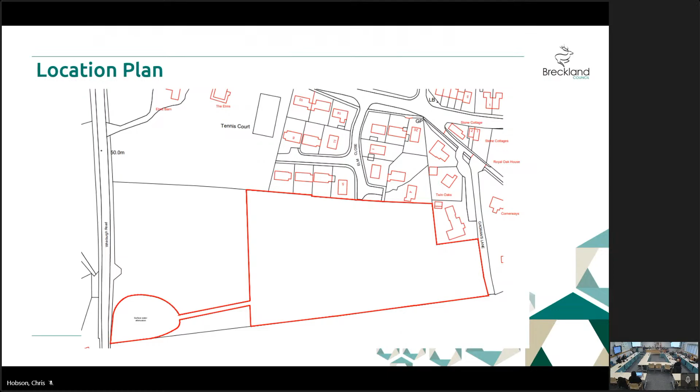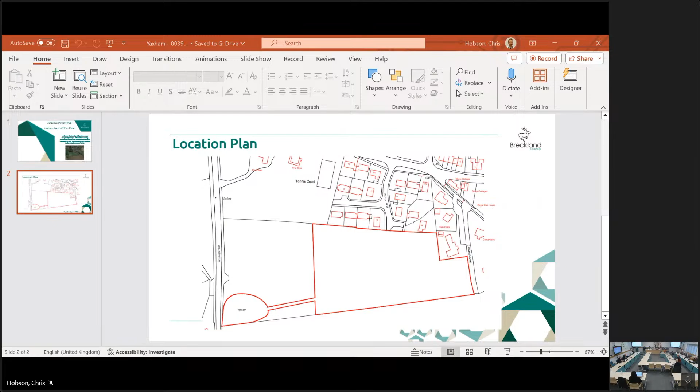Good morning and happy Christmas. My name's Graham Howe. I'm a parish councillor for Yaxham, and in my former life, as I'm now retired, I was managing director of Hill Partnerships and Kier Construction, both fairly sizable construction companies.

We of the parish council are opposed to the reduction of affordable homes by Flagship on this site. I'm not going to rally on for our reasons, but they are recorded and summarised in our response, which was posted on the 2nd of October. The affordable housing allocation to this planning application was the only real benefit that this development will bring to our community. We have read the responses returned by Flagship to this application in detail, and we are somewhat confused by the financial values posted by Flagship via Watson's letter in their response dated the 22nd of November, which is still modelled on the provision of 40% affordable housing, but I guess this is by some way of providing a comparison.

We note Flagship's comments at the Planning Committee meeting of the 31st of October, repeated in their letter dated the 4th of December, which states Flagship Group's purpose is to deliver affordable housing, and Flagship Housing Developments will endeavour, using options available to us, to increase the affordable housing on this scheme back to 40% as the scheme progresses. We would really welcome this, and we seek confirmation from Flagship that the houses in question will retain affordable housing specifications, or are they one and the same as those that are for housing for sale?

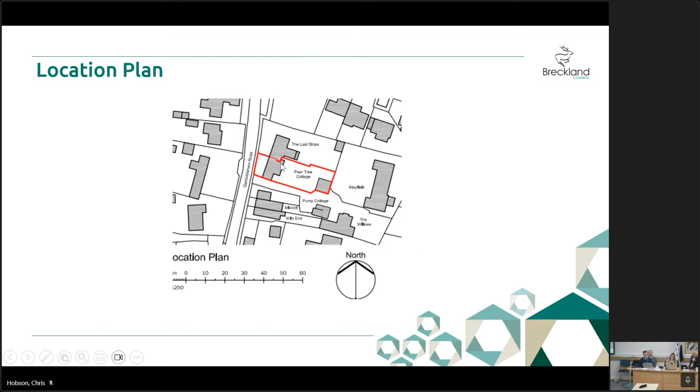Okay, so as you can see, this is the location plan. So you've got the site here in red. So this is Pear Tree Cottage, the existing dwelling, and then this is a detached garage at the rear, and it's semi-detached with the neighbouring property, the Last Straw. And then, as you can see, it's also situated in an area of residential dwellings. And then this just gives you further site and wider context. Just to note that this is the centre of East Harling here, so it shows the proximity to the main centre.

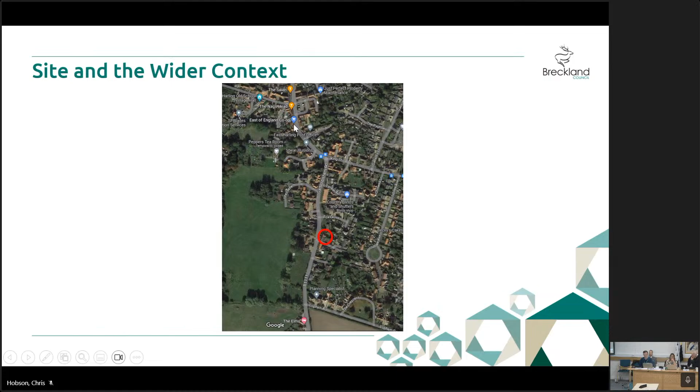Okay, so this is the proposed site plan.

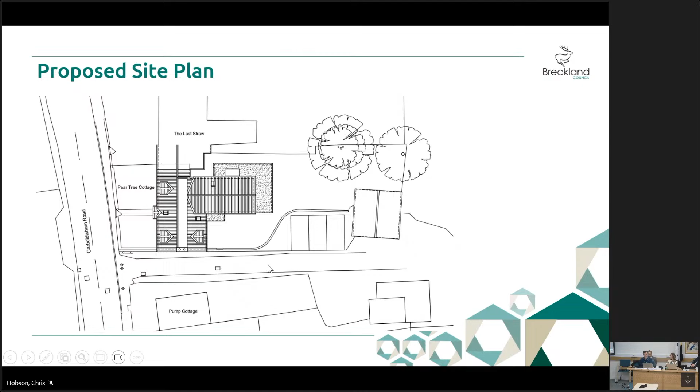As you can see, this is just to show the existing dwelling, which is situated here, and then this is the rear. The parking is going to be situated here, and the existing garage is going to be retained as part of the development, and the main access for the dwelling comes off Garboldisham Road here, which is shared with other properties within the vicinity.

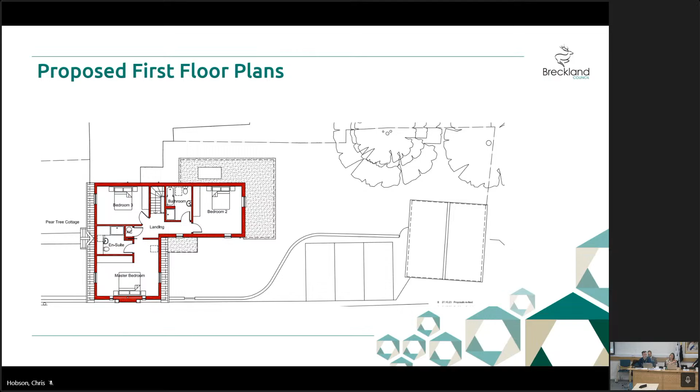And then, as you can see, this is the first floor. So you've got 3 bedrooms that are proposed. And then these are just the proposed section plans.

So it's not formally designated within any heritage, it doesn't have any heritage protection as such. However, as you can see from the property's aesthetic, it's got a thatched roof, and it also has many traditional features. So given the aesthetic of the property, the Historic Buildings Officer for Breckland Council was consulted.

They did confirm that they held concern regarding the loss of the building. So for them, they considered that the building had heritage value, and so after an assessment against Historic England's local listing criteria, as officers, we did consider that the property was worthy to be considered a non-designated heritage asset.

So non-designated heritage assets are where they have protection under the National Planning Policy Framework, and it's where local authorities can govern a local list to protect these properties or buildings where they consider there to be heritage value.

So your local plan policy, ENV 08, restricts the demolition of non-designated heritage assets, subject to demonstrating that it's no longer either viable or structurally sound to retain the building.

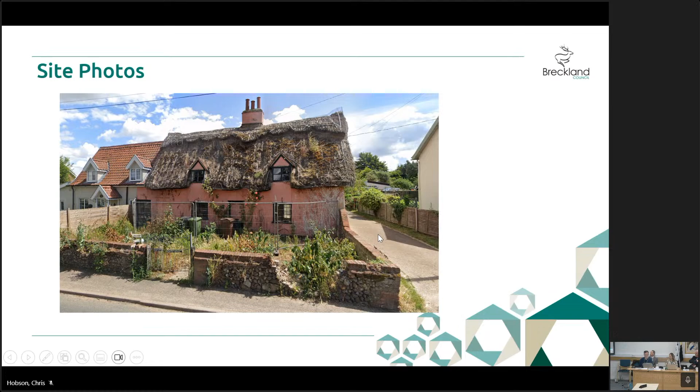So as you can see, this is the current property looking at it from Garboldisham Road, and this is the access. This is it looking at it towards the rear, and as you can see, this is the neighbouring dwelling there.

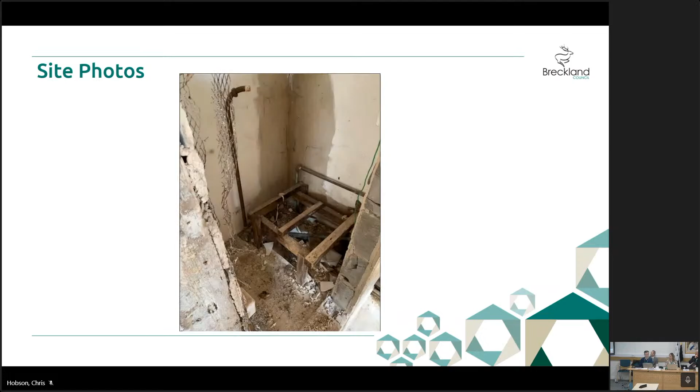And then this is looking at it from the rear of the garden, and as you can see, there's another neighbouring dwelling. The next couple of pictures just demonstrate the current condition of the property at the time of the visit, noting that the property condition has deteriorated during the application process. This shows some of the internal condition of the property at the moment. This is on the ground floor.

As set out in the officer report, the application is recommended for approval subject to conditions. No objections have been raised by the parish council, neighbouring dwellings or neighbours, ecology, and also highways. It should also be noted, as this is a replacement dwelling, it is neither caught by nutrient neutrality, and no GIRAMS is required given that it's not creating additional overnight stay within the district.

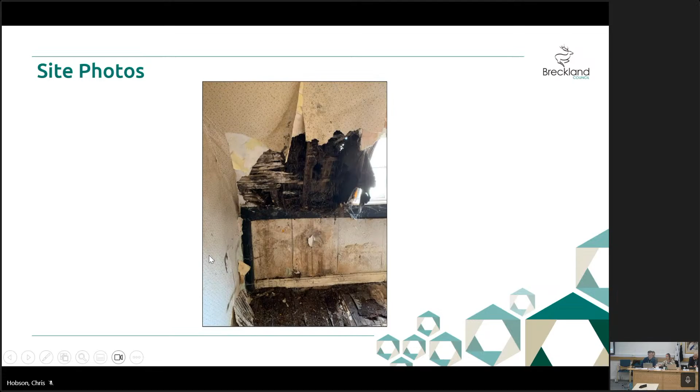Thank you. Before you finish, do you just want to quickly show the design again? Yeah, just show the dwelling. Just quickly, there you go. And just to show what the proposed dwelling will be looking like.

Matthew, before I move on to the speakers, could you just clarify for members the flying freehold aspect of the neighbouring property? Is that something that the agent sets out? Yes, fine, I'll leave it to the agent, he may wish to. I just want members to be clear that there's a lot of detail gone into this application. Okay, it's over to you then, Mr Cowan.

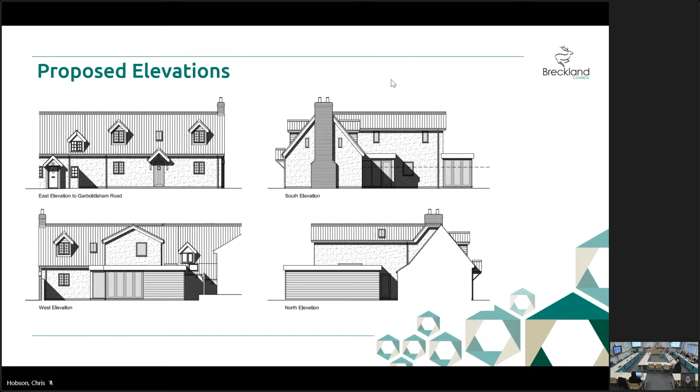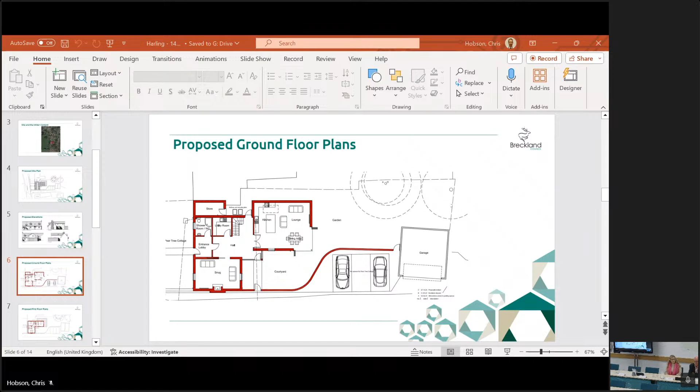3 minutes, sir. Thanks, Chairman. Thanks for that, Matthew. The last point the Chairman was discussing relates to a flying freehold. As you look at that plan, that's now disappeared... ooh, there we go. So as you look at that elevation, the main elevation to the street frontage, you'll see two dormer windows to this particular cottage, and immediately to one side, that's the neighbouring property. That's a flying freehold. The first floor of the neighbouring property oversails the ground floor of Pear Tree Cottage, which gives quite a challenge for anyone to work with.

As a result of that, the plan you've seen before you has been modified to ensure that we can support the neighbouring property and provide it with a substantial and weather-tight enclosure. The roof of the existing cottage, as you've seen from the thatch, oversails that bedroom, and that bedroom is leaking quite considerably. The deterioration that Matthew mentioned is pertinent, but it's also important to recognise that when my client purchased this property, it was in that state anyway. Over the last number of months, we've been working both with my client and with the team here at Breckland to develop a scheme which they feel is acceptable.

There is no doubt the existing house itself, Pear Tree Cottage, has been adjusted and altered over time. The central chimney, a classic problem, was inserted at some point in its history. Ground floor headroom is about 1.5 metres, and the first floor headroom is not much more than that, and in fact the eaves are very, very low. So when we started this journey with the planners, we had anticipated replicating the footprint of the existing cottage, but that required us to do work in the roof to increase the headroom upstairs and downstairs, and it was that which pushed the ridgeline considerably higher than planners were prepared to accept. As a result, the scheme you have before you increases the footprint in terms of depth front to back, but that enables us to create more headroom in the property as a consequence.

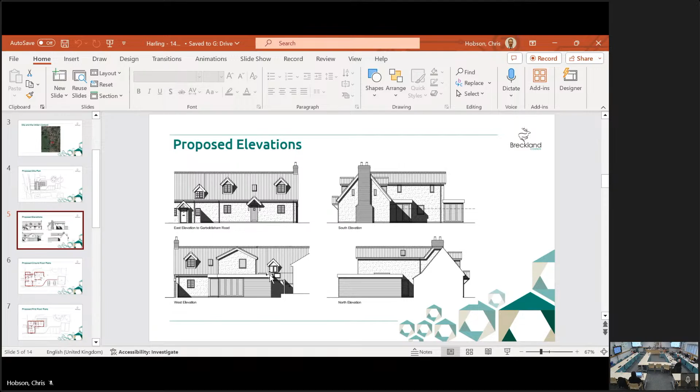Thank you. Councillor Bambridge, please. Well, Chairman, I think knocking this down and replacement is something which I am going to vote for, but only just. I think these particular cottages are so iconic for this area that we should be protecting them as far as we can. But I do accept what the agent and the officers have said, that this one possibly is beyond repair, although I've seen worse recovered. If we're perfectly honest, I think this particular cottage was going wrong a lot of years back, and has now been allowed to get how it is. But I think it was heading that way anyway, and it can't be stopped.

Okay members, I'm going to take the vote if there's no more questions. So with regards to this item at East Harling, 3PL 2022-1417, it's in a full format. Your officer's recommendation is one of approval. Can I show of hands please? That's unanimous, that's approved, thank you very much.

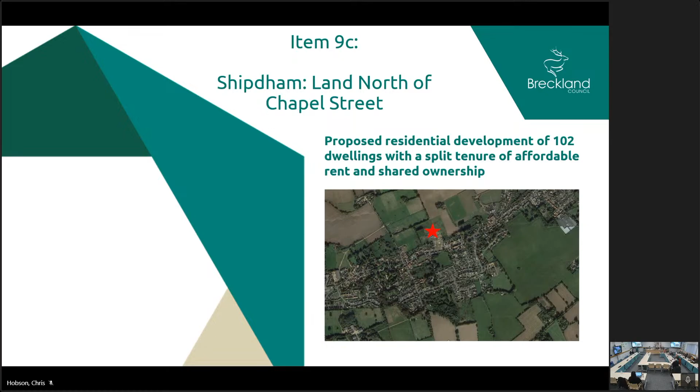So just going on to the presentation of the application itself. You'll have gathered from the main report pack, it's an affordable housing scheme for 102 homes, split tenure of affordable rent and shared ownership. So I'll introduce the site.

I think a lot of the members may recall this site. It's been around for a number of years in different guises. So we're looking at the site edged red here. It actually sits due north of the former Wagon and Horses pub, which has now been removed from the site.

Down here we've got the garage, also removed, and the access has been provided at present. We'll see photos in a moment.

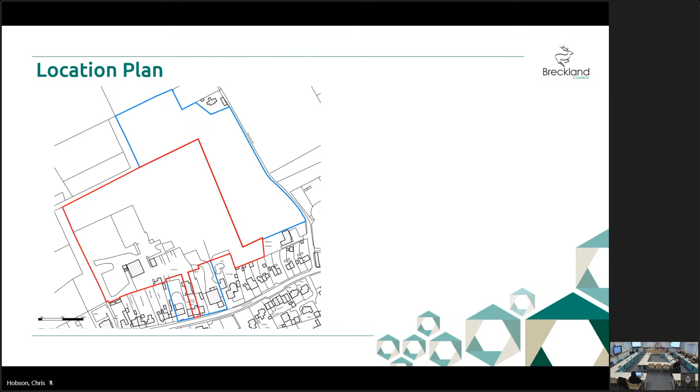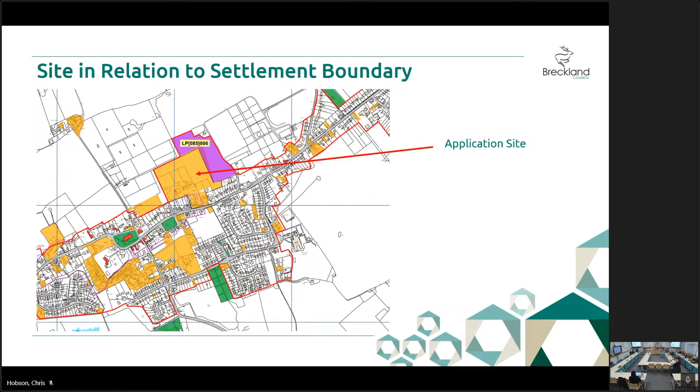Just moving on, to give you a further update of the site itself. Chapel Street again running to the south. You see the access which is built. Open fields due north and west. The actual surgery sits just southwest of the site. A residential site sits opposite, to the south of Chapel Street, with residential generally along the frontage here. The convenience store sits just here.

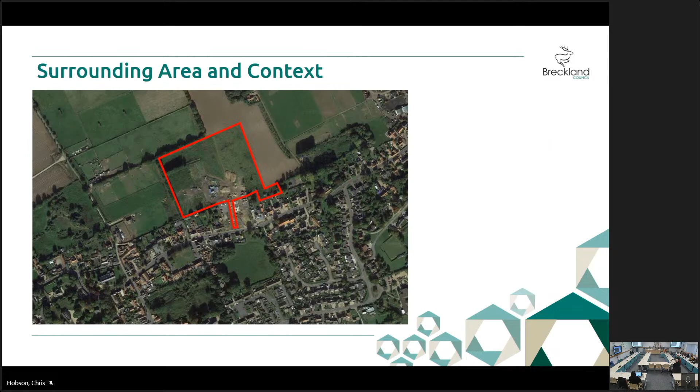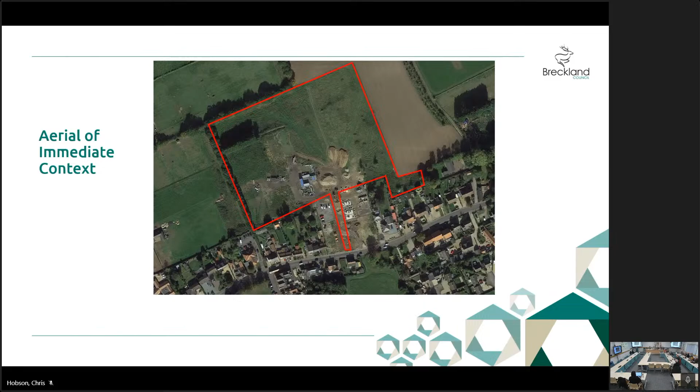That's a closer image. You can see the residential properties along Chapel Street here, generally 2 stories along here. There are single story properties here, going up to 2 stories as we move further east. The site just sits beyond here, with the single story property, then 2 stories as we head further east.

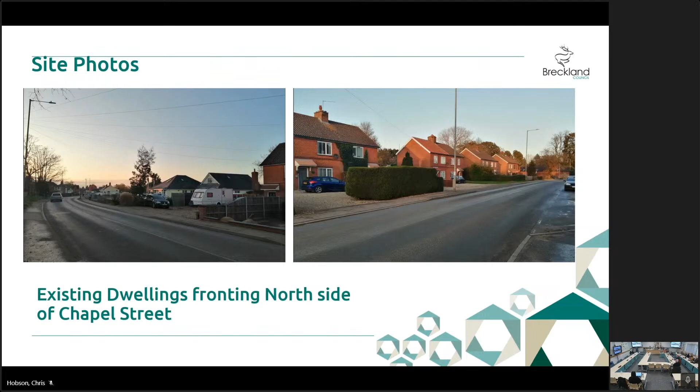That view continues as we head further eastwards on the A1075, giving an idea of the built form. That's the opposite side as we look at the site access due west of the site, 2-story again, giving an idea of the character of the street scene.

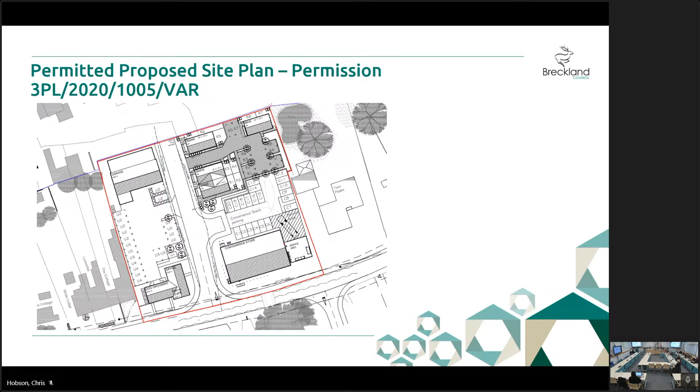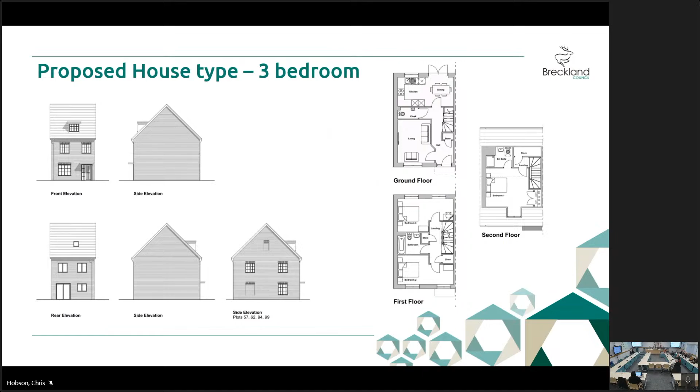Again, an example of a 3-bed, with some traditional features added, bay windows etc. We'll go into the materials in more detail in a minute. That's the example of the 2.5 story, with windows added to the side gables. And then a 4-bed semi, again 2 stories.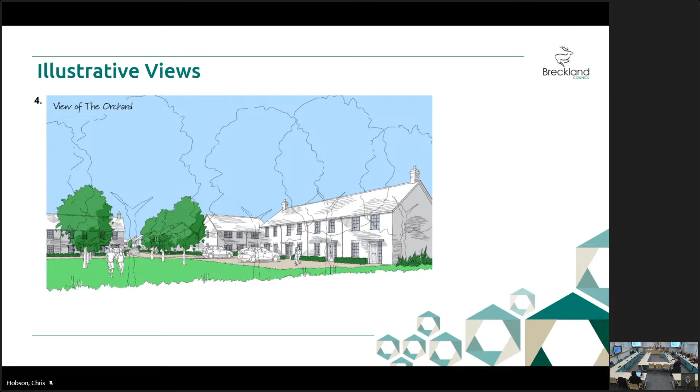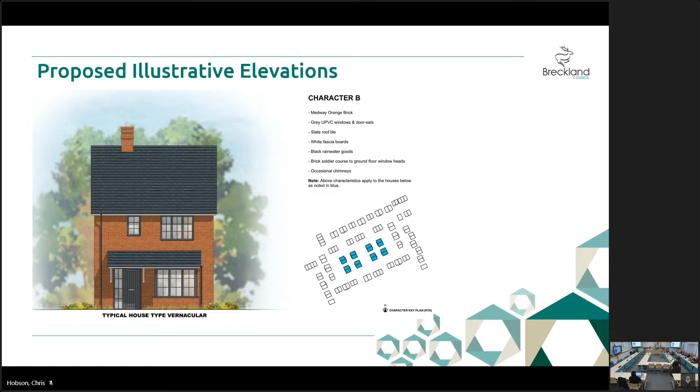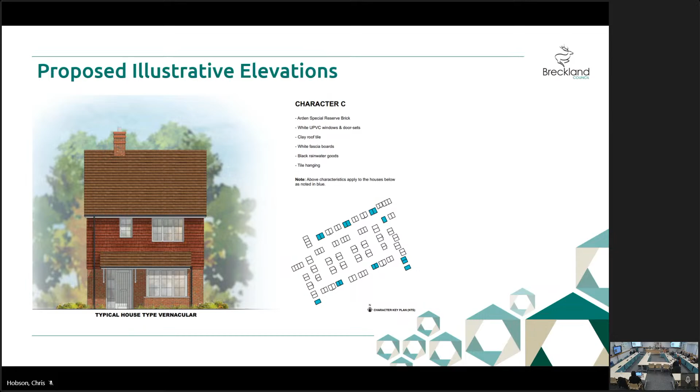Just in terms of materials, generally a conventional approach, mainly use of brick, so there's a general mixture of approaches there. We see the use of grey, but also red clay pan tiles, red brick, and those clay hanging tiles. Those examples of materials are reflecting a traditional approach in terms of the fenestration, doors and windows.

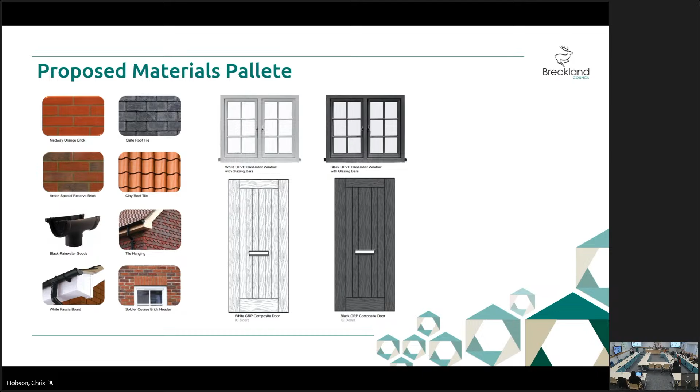So yeah, I mentioned landscaping, that's been key to the design approach the applicants and their architects have taken. Street trees along the frontage, hedgerows along the frontage as well, continuing around the corners. Additional tree planting all the way around here as you enter the site from the south. And there's the example there. So you've got the orchard at the top, hedgerows again continuing through the site.

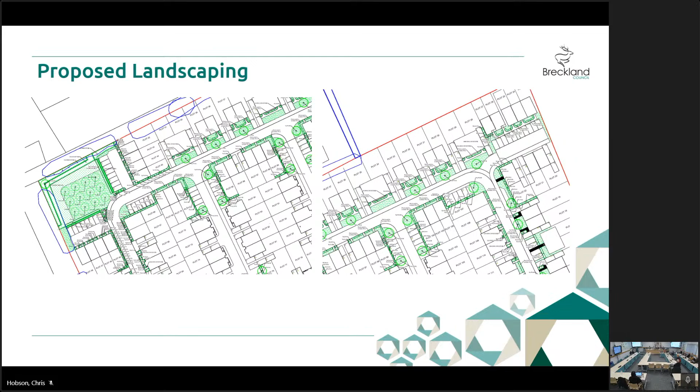So again, I'll just go back to that main site plan slide. You'll see from the report, the consultations etc., the parish council are in support of the application. We have received objections from the local community, 7 objections. But as you'll see from the report, in terms of the matters of infrastructure, impact on highways, the character and density issues, impact on street scene, those have been considered within the report, and we can talk on those in more detail.

So when we look at the principles, as mentioned, this sits in the settlement boundary, so it's where we want to see new housing. There is an extant permission for 90 homes, so the principle of residential development of this kind of scale is established. The applicants are seeking 12 additional homes over that permitted level. So there is an increase in density, I can come on to that in a moment, but in principle, proposals are acceptable in accordance with the plan in terms of where we want to see homes in the local service centre.

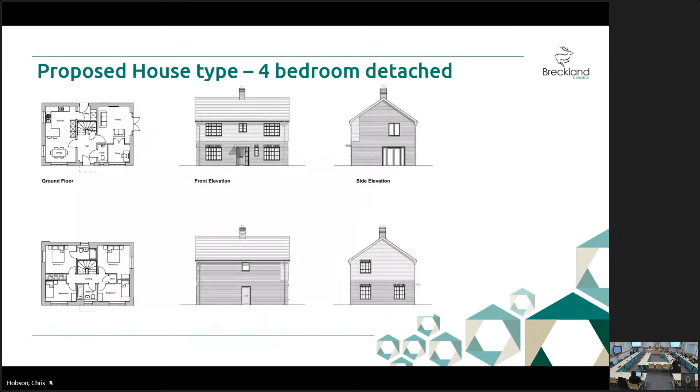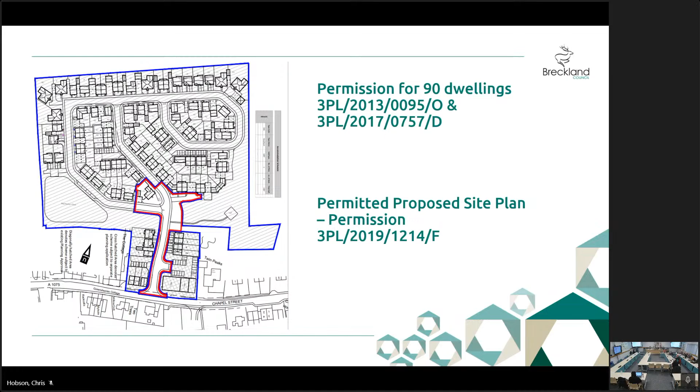Turning on to the character, as mentioned, there's an increase in density which takes it up to 27.6 dwellings per hectare. When we've looked at the scheme as a whole, there is an increase, but as mentioned, from the previous slide of what was previously approved, when we have regard to the scheme overall, there is an increase as proposed. But as previously shown, quite a dense layout, tend to be larger units with detached garages. So when we look at the scheme overall, the built form is still considered to be acceptable and doesn't create any built mass over and above what was previously permitted.

So when we looked at the character, we talked about the house types. A traditional approach has been taken, which has been welcomed. The applicants have worked with us to improve that through the application process. And what we've welcomed as well is the attention to the soft landscaping, we can see the amount of trees and the approach here within the site plan. So when we looked at the scheme overall, the proposals are considered to be acceptable in terms of design, appearance, scale, and height.

Where we've got that additional height, it does sit within the settlement form closer to the built form here, so the 2.5 stories here and here, which will be adjacent to the allocated site here, which will obviously come forward in the future. But going back to the principle, we do have to have regard to the site allocation just here, and that does require access to be provided to it through this site, which it has done through the amendments to the scheme here.

In terms of amenity, the proposals are considered to be acceptable from an external private amenity space standards and approach for those future occupiers. There's in excess of 50 metres from the nearest properties here down to those on Chapel Street down here. As you'll see, the impacts aren't considered to be harmful.

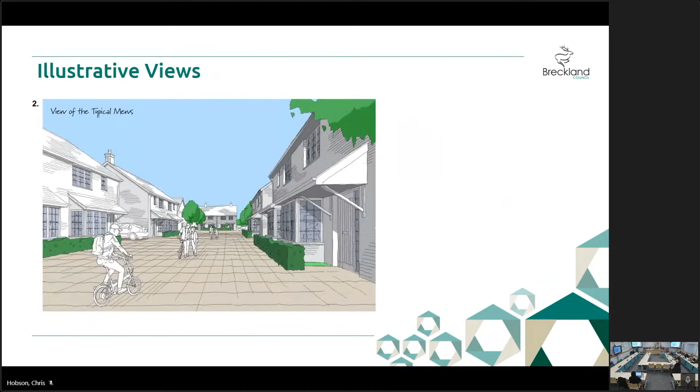Turning to flood risk and drainage, I've touched on the proposals there. There is a surface water flow path that runs through the site. The applicants, through the updated flood risk assessment and drainage strategy, have updated their strategy to take account of that, creating a ditch along the northern boundary, conveying that through the internal system to the attenuation features on site. As mentioned previously, the proposals would discharge to the existing drainage ditch down here, to reflect the greenfield runoff rate, so there'd be no worse than the greenfield rate at present.

The updated drainage strategy includes SUDS features, so the use of permeable paving within the private drives, rainwater harvesting, etc. We're awaiting further comments from the Lead Local Flood Authority on the surface water drainage strategy. Again, the recommendation is that that's left with officers to resolve, subject to no objections being raised by the Lead Local Flood Authority in that regard.

Quickly touching on heritage, the site access sits within the Shipdham Conservation Area, which roughly finishes down here. So the site edge red does run through it, but as you note, the access has been provided on site here. Proposals are considered to provide sufficient gap to the conservation area boundary here. So the proposals aren't considered to cause harm to the significance, character and setting of the conservation area, and are acceptable in that regard. You'll see the heritage officers raise no objections.

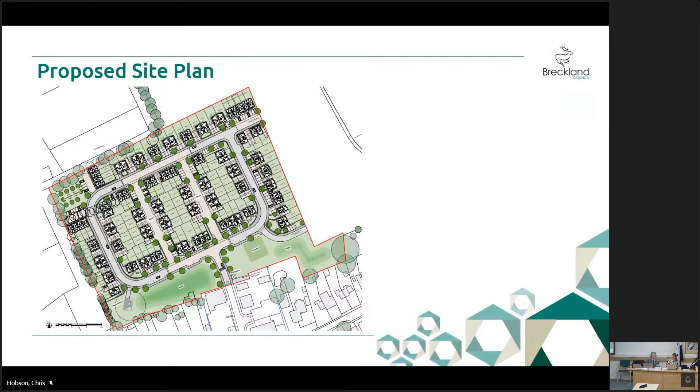Do you want me to get the plan up, Councillor Bambridge, that'll help. Just zoom in. In terms of where it goes to, there's a ditch network running just due southwest of the site. It'll be attenuated in this basin here, and there's a connection in this corner which will connect into the ditch at this point here.

As Rebecca said, in terms of the process, the applicants have seen the comments of the Lead Local Flood Authority and met with them to discuss their concerns. On that basis, they've submitted the revised flood risk assessment and the SUDS strategy to address those comments. Just wondering what the capacity of the ditch was as well, wasn't it?

Well, really, you're wrong about where the ditch actually goes to. We're talking about a load of houses right within a community. We had a situation a couple of weeks ago where Attleborough had around 100 houses flooded in a built-up area where houses had been built.

We can take account of this. There are quite simple processes for dealing with water which developers don't seem to be doing anywhere. I'm not being critical of you there, it's a national problem, and we really do need to get hold of it. I'd hate to see our neighbours in Shipdham being flooded out in a year or two's time because this ditch system was inadequate. Whilst that does look like a reasonably large lagoon, I'm sure it's not actually big enough to deal with a 20 or 30-year storm, much less a 100-year one.

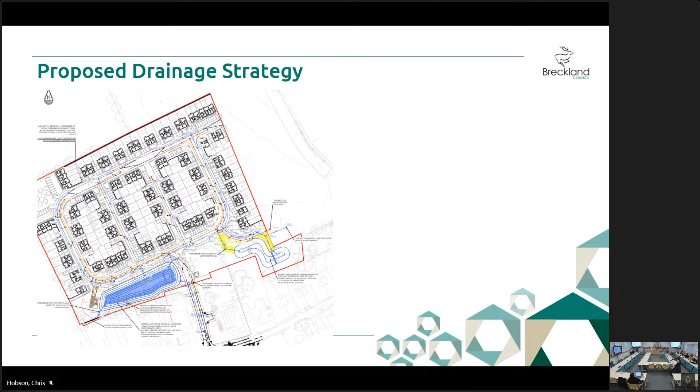Thank you. All developers are very naughty, but not you. There we go. Okay, Councillor Wilkinson, please.

Just a quick one, Mr. Chairman, going back to what Councillor Clark said about the housing types, because it's full now. You've mentioned all the house sizes, because it says the housing enabling officer said we would be willing to discuss provision of a higher number of 1 and 2 bed homes. Have those discussions been had, and will what we're seeing in front of us not alter?

Yeah, I think I touched on it before. Those were the comments of the housing enabling officer at the start of the application process, and discussions were had with Places for People.

Councillor Kittle-Morris, please. Yes, thank you, Chairman. Can you confirm, or somebody confirm what I heard, that the attenuation of the SUDS system would be equal to the greenfield runoff rate of a bare site? Therefore, if the ditch is doing the job already of greenfield runoff, it should be capable of actually dealing with development through the SUDS system.

Yeah, that's correct. Exactly correct. Chairman, that answer may be correct, but it's not actually a correct answer. Okay, thanks for that. Councillor Bambridge.

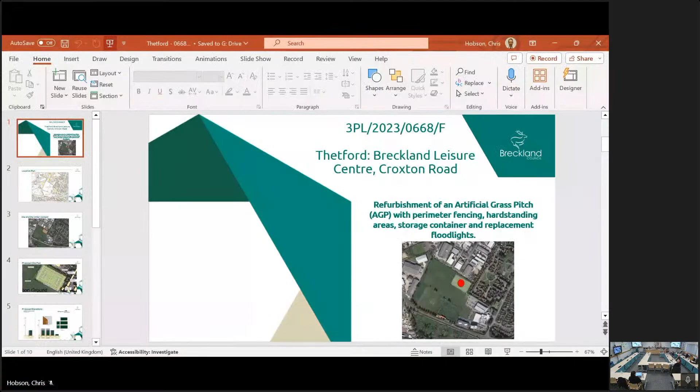Thank you, Chairman. So this is an application for the refurbishment of an artificial grass pitch, otherwise known as a 3G pitch, as referred to in the report, with fencing, some hard standing areas, storage container and replacement floodlights at Thetford Leisure Centre, Breckland Leisure Centre in Thetford on Croxton Road.

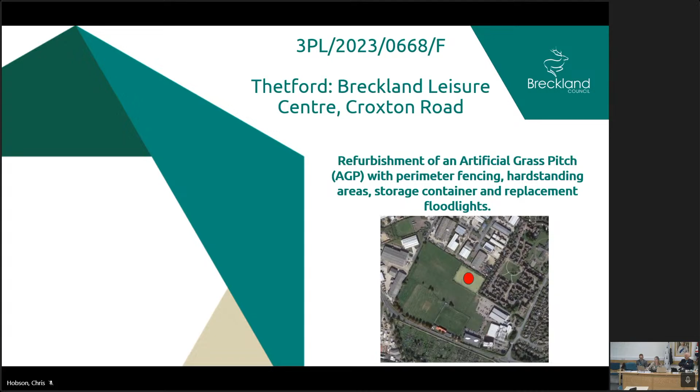So here is the application site marked in red for you on the screen. Importantly, this is the application site that is marked in red. You'll note the blue line which covers the entire site, including the building at the frontage. When we get to the aerial view, you'll note there are surrounding grass pitches to the rear. So this application specifically only relates to the red line boundary shown on the screen.

Why I'm pointing that out is because you'll note from the officer report, the supplementary, and since the supplementary was published, we've had 2 more comments. Those representations in the supplementary and the 2 recent comments, plus those already noted in the officer report, all set out concerns about not having access across these green open pitches.

Previously there was an ability to walk across this open site into some of the surrounding development sites in the area, not part of this planning application - you'll see photos later. The entire area has already been fenced off by the leisure centre. That isn't part of this planning application, and didn't need planning consent because the fencing's below the required parameters.

That's because various antisocial behaviours were taking place, access by means other than walking and cycling, people letting their dogs foul on the area and making the pitches unusable for playing sports and recreation. Again, members, that is not for consideration as part of this application. You are only considering the works within the red line - that's the fenced area, the resurfaced pitch, the hard standing, the container and the floodlights.

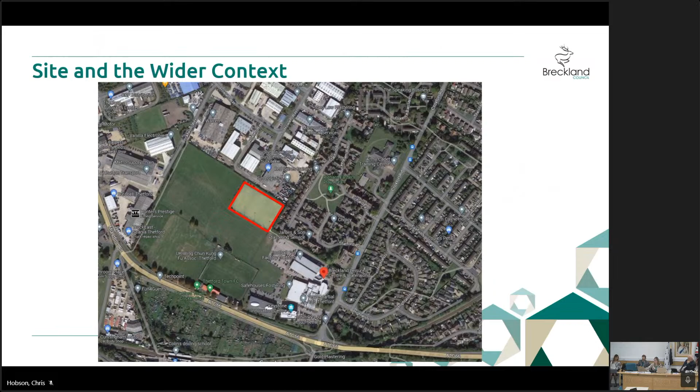Through the course of the application, we have negotiated with the applicants. It is their proposal to set out what's referred to in the report as a 3G pitch, or an artificial replacement pitch, to improve access for local football clubs in accordance with the FA League tables. You'll note from the officer report that includes a small storage container, just for supplementary storage, and some hard standing areas for viewing around the edging of the pitch. I've got some photos of that to show you.

There will also be new floodlighting columns. Those columns are actually slightly shorter than those on site, with better angled and more improved lighting to serve the pitch, reducing light spill on surrounding neighbouring properties. However, the fencing being erected is actually higher than that already within the application site, to prevent balls going into people's back gardens and to ensure the spec of the new artificial 3G pitch meets the required standards for competitive play.

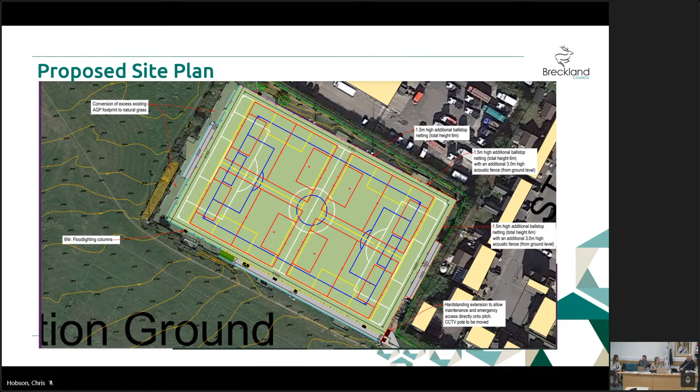Just to show you some images of what you've got on the site - on the left-hand side of the screen is your existing floodlighting columns and fencing, and on the right-hand side is what the applicant is now proposing. You can see that's slightly reduced by 2 metres in floodlighting height and angled specifically at the pitch to improve the wider amenity impact. You can also see the increased fencing here.

That increased fencing is for the ball spillage I've already mentioned. You can also see behind this element the acoustic fence, which is set out in the report - I'll come on to that in a minute. And then also just a very modest storage container, which will be supplementing the use of the site.

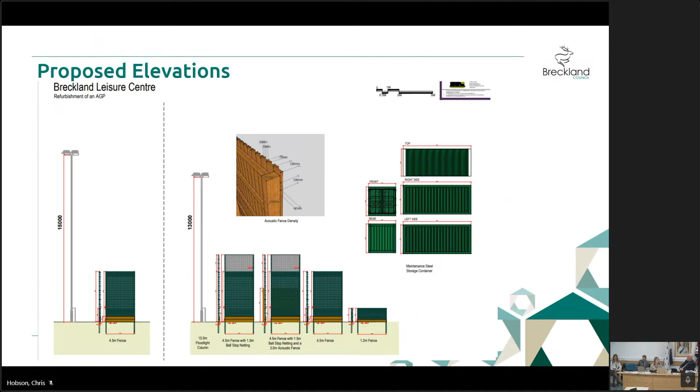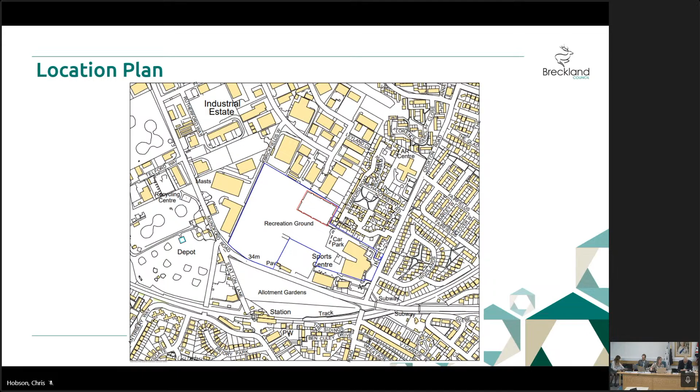Thank you, Rebecca. It's open to question. I've got Councillor Atterwell.

Yeah, one question and a comment. The question is, you showed on the photographs the high netting to stop balls going into the gardens. Is that remaining in place? No, the netting will go and the new fencing will replace it, which is why it's higher.

Okay, I'll give you 6 months and you'll be back putting the netting up. I guarantee it, because the ball's just going to sail over this fencing you're putting up. I can't see that that's an enhancement.

And just really a comment. The loss of the hockey, to me, doesn't seem like an enhancement of the site. You say we'll be able to play football on it, which is great, but you can already play football on it, and you can play hockey. You can do both types of sports, accessible for people who want to play two types of sport. You're now precluding one section of the population of Thetford who want to play hockey, telling them, get on your bike, mate, you've got to go down to Watton. That doesn't seem very sustainable to me, so I can't support this. I don't think this is an enhancement.

Okay, well, it's not us. It's not Breckland, it's the applicant putting this forward for the change of this pitch. Well, it's totally us, isn't it? But not the planning department. We don't have...

So the FA are doing the funding application to do the work, certainly, but obviously we do own that site, and we're working in combination with them, but we wouldn't be paying for it, I think is what Nigel's saying. Just to clarify, it's us, we own it. It's not FA funded, but it's us. It's a Breckland Council application, isn't it? But it's not me, council own the site. I'm not doing it as a councillor, I'm planning, so you're having a go at me, but I'm not.

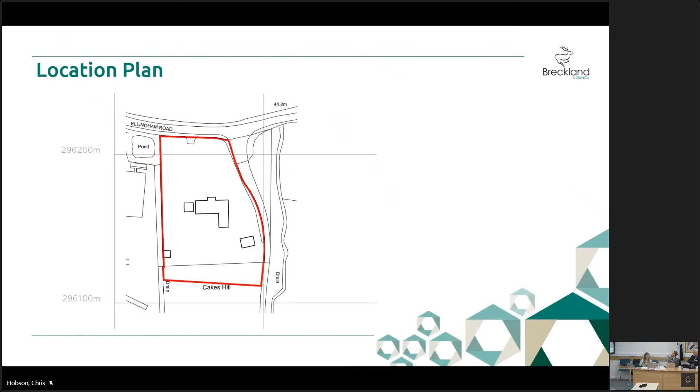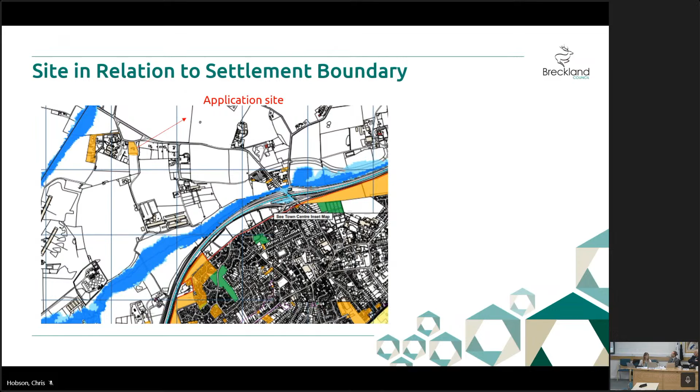It's just off the B1077, which runs between Great Ellingham and Attleborough. There's the site in relation to Attleborough settlement, and this is a picture of the dwelling in question. So the application seeks to remove an agricultural occupancy condition attached to this dwelling.

This dwelling was permitted in 2016 on the basis that it was in relation to an agricultural business on this holding and an AD plant. It was approved subject to the restriction, meaning that only an agricultural worker could live in the property. So the applicant now seeks to have that condition removed.

This falls to be considered under policy, as you've seen in my report, policy HOU 13 of the local plan. That's got two requirements. First, you need to demonstrate there's no longer a need for the accommodation on the holding and in the local area, and that the property has been marketed for a reasonable period, at least one year, at a price which reflects the existence of the occupancy condition. The applicant will be required to submit an independent valuation to justify the marketing price.

So firstly, there certainly is no longer an agricultural business at the holding. That's accepted; the business has now ceased, and the agent on behalf of the applicant has also advertised the property for purchase within the local area with the restriction in place, and has undertaken direct marketing to a list of some 37 agricultural businesses in the area. This marketing did not result in any uptake, so that covers the first element of the policy.